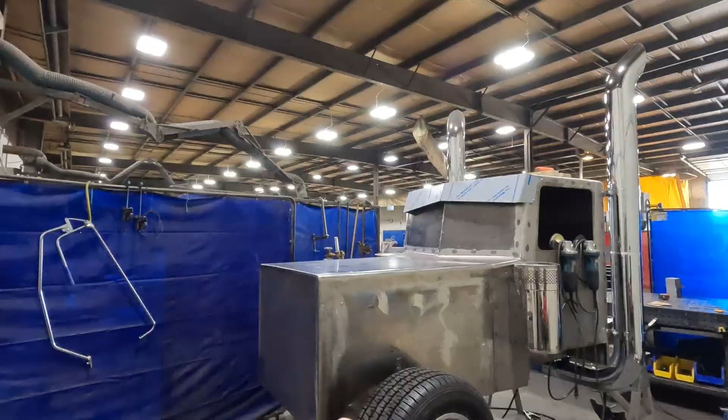So it's crunch time, I have to have this done by the end of the month. In this episode we're gonna go from this to this. Stay tuned, you're not gonna wanna miss this.

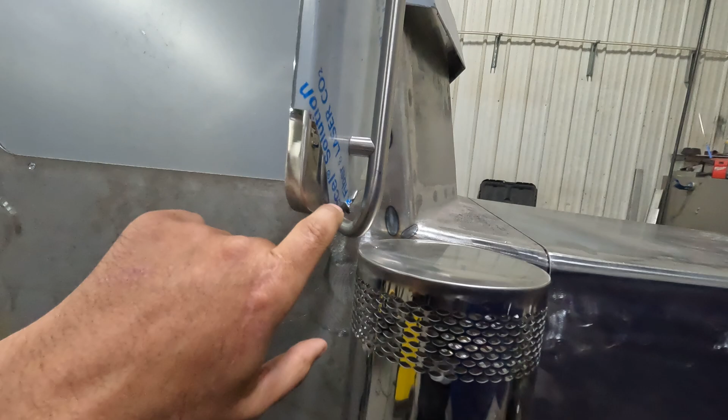I had a complete awful morning this morning. I was a couple minutes late for work, my kid forgot his swimming stuff so I had to go back to drop it off at his school, and a cop pulled me over to inform me my registration is out of date. But luckily Gabor, the Hungarian fab machine, has my back covered, so he's been extending the frame rails. It's awesome when you work with a guy and you can just trust that he's going to get the job done right. Gabor also finished up getting these mirrors mounted, so we got a real nice little cope going in, held on with screws, nice and stable, nice and secure, perfectly straight and level. He did an awesome job. Thanks for rescuing my morning, keep up the great work Gabor, appreciate all your help and what you do.

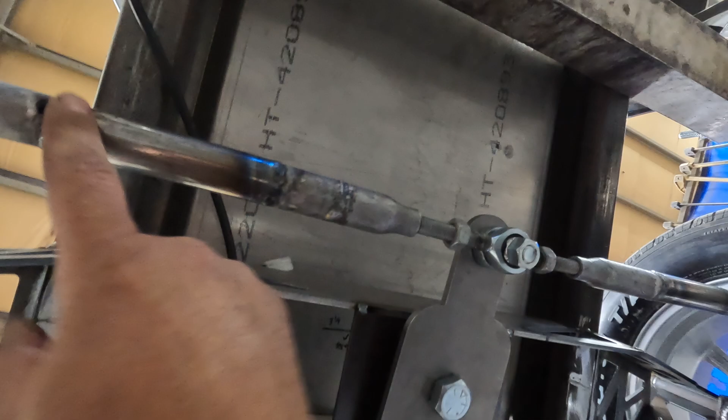So underneath the smoker right now, and I got the steering kind of dialed in, it's just clamped on. We had to extend my pivot point out further, went to a single pivot point off of the tie rod ends, which we lengthened 4 inches.

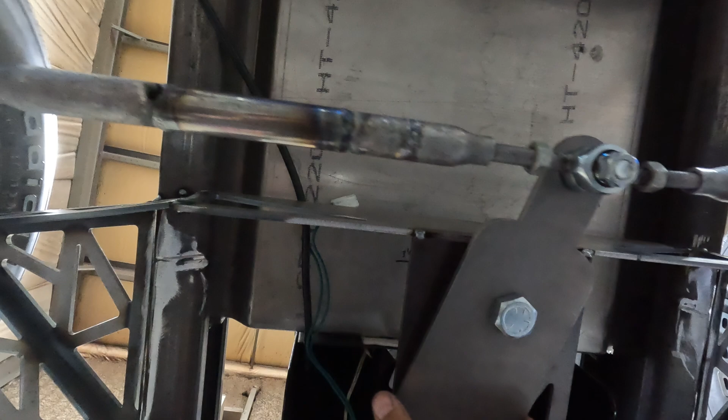Turning it, checking clearance. Not having any binding, not having any issues turning it, so I'm gonna call that good.

I'm gonna pop my pivot piece off because I actually want a 1-inch bend down there and down there, and then I can weld a receiver hitch tube to it. Then the tow bar will just work off of a standard receiver hitch. I'll clean up the stuff underneath here, pop this stuff off, get this bent, weld some stuff out, and do some adjustments.

So this has been adjusted. I set this camber to the exact same as the other side, and I also set this angle to the other side, but first I leveled the truck so I could get accurate measurements. These are to the 100th of a degree, and this is 0.03 degrees off over camber, so hopefully the tire and all the weight just allows a little bit of relaxation.

While I was doing that, Gabor was welding out the frames, keeping those nice and straight. Back to work. And there we have the bumper placed.

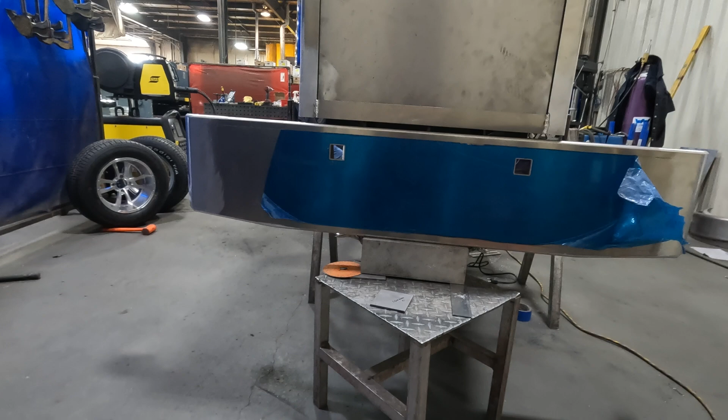So I set the height of the tires off of this spool, and the bottom of the tire was measured with a 3-inch piece of tubing. This is a piece of 4-inch, so in relation the bumper should be about 1 inch off the ground. Got a pretty tight clearance.

So my gaps are all right, clearance the whole way, nice and tight fit. It closes, looks proportional, looks pretty killer.

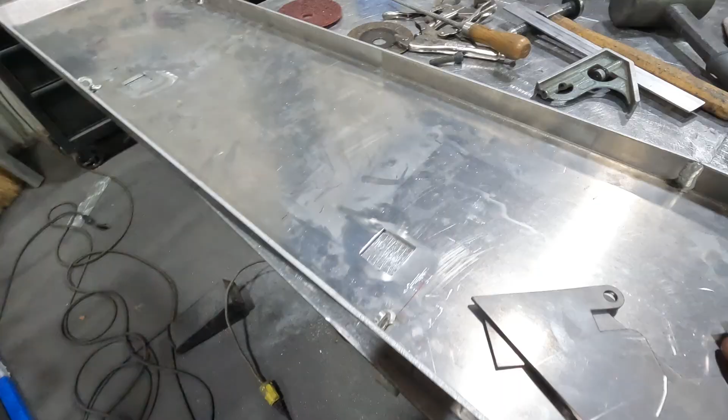So we now have bumper brackets cut out, adjusted ones. These are gonna kind of come up like that. This gets welded on the truck, it'll pivot. You have to allow everything to move and keep the pivot points up and far enough away that it doesn't interfere with the tire. Animal guard cut, ready to get bent.

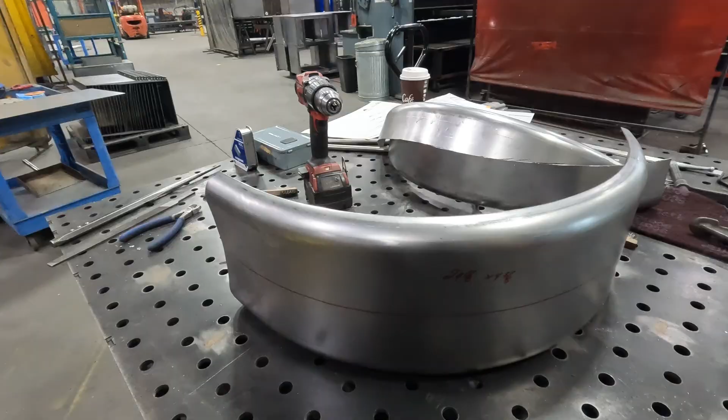Got one fender cut, got the other one marked out, and I will zip cut it now.

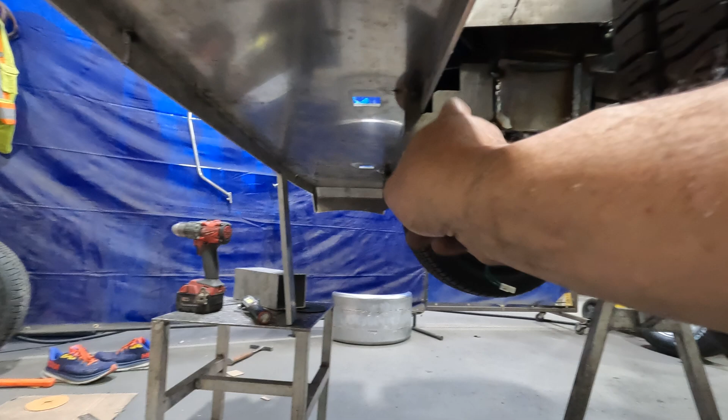Fenders widened, welded up, one left to weld up. Gabor's been doing awesome on the front bumper here, swings down nice, and when it pivots up, the flange here actually recesses into the bracket.

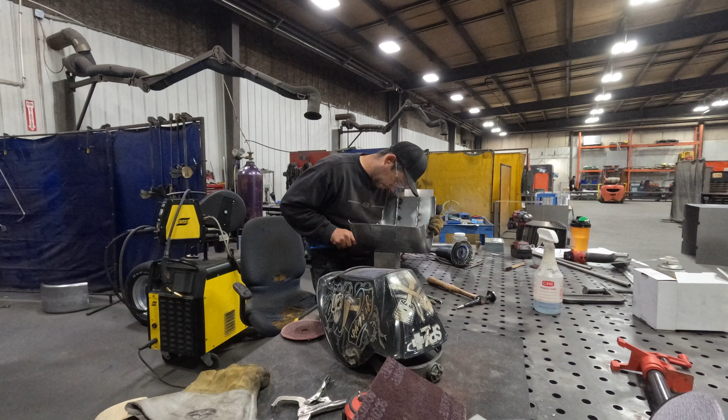So I've been trucking away on my fenders. I got this one just sitting up there, it's not actually mounted like that but it's extended. The radius is changed, and I sanded out the marks from stretching the flange to change the radius.

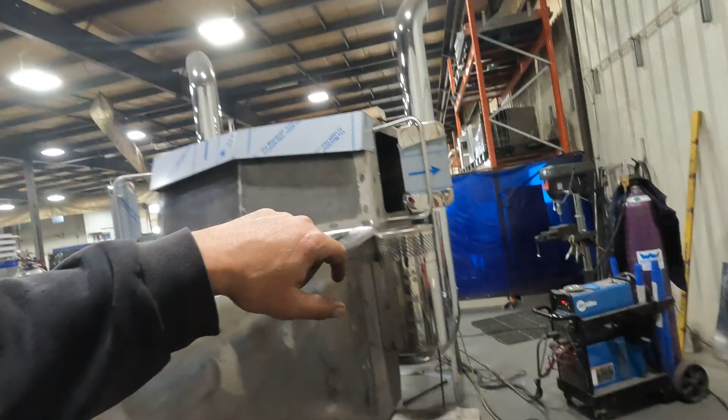Clients came down, they had a look, they said this mirror's just a little too big, they want it to be smaller. So I got to take 2.5 inches off the height and 1 inch off the side. Kind of sucks, took a little wind out of my sails, but is what it is. Client's not happy, it's not right.

Let's get the fenders on the truck. They added a few things that I have to do here, so long ways to go, short time to get there. Let's set up time lapses and enjoy the next few minutes as I bust out a bunch of stuff.

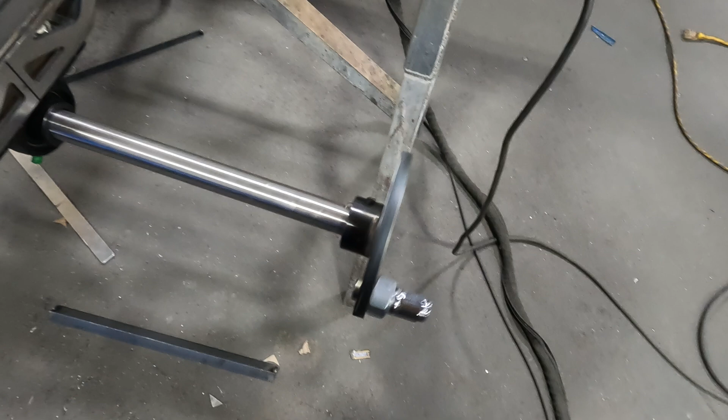Drew up these brackets, kind of look like a little stormtrooper, but now the axle is set in place. Got to straighten this stupid hub from Princess Auto, that's no bueno. This axle was quite stubborn as well too, it was a pain in the butt to get in there. We had to use a lot of spit, sanding and persuasion to get them in, but she's in.

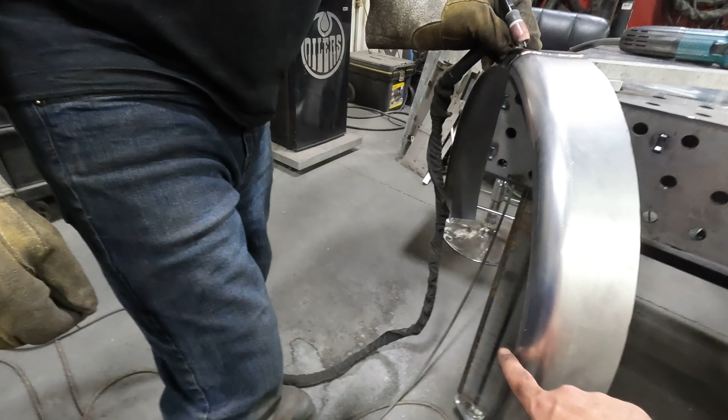Got our rear fender tubs cut in half, we're knocking off 4 3/4 off each one. Gabor's putting them together using some silicone bronze, and then we'll planish them out and flatten them down, and on the bottom half we'll take the radius out.

Are you having fun? I'm gonna get suited up, let's do some aluminum TIG welding and get those steps all finished.

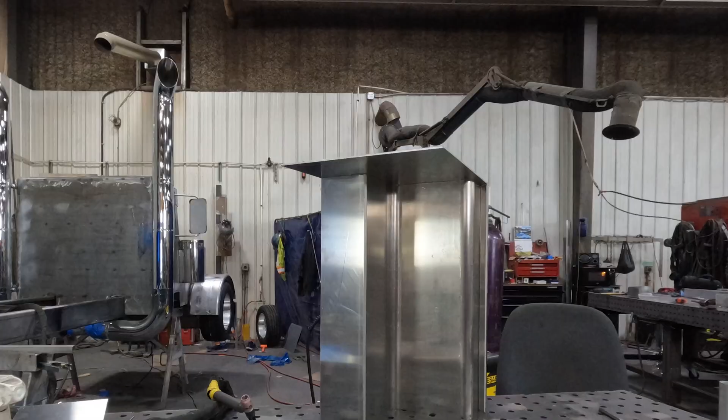I got the steps with the mock air tanks up there. So I'm just waiting for customer approval before I finish welding everything out and get the brackets built, to make sure it's okay.

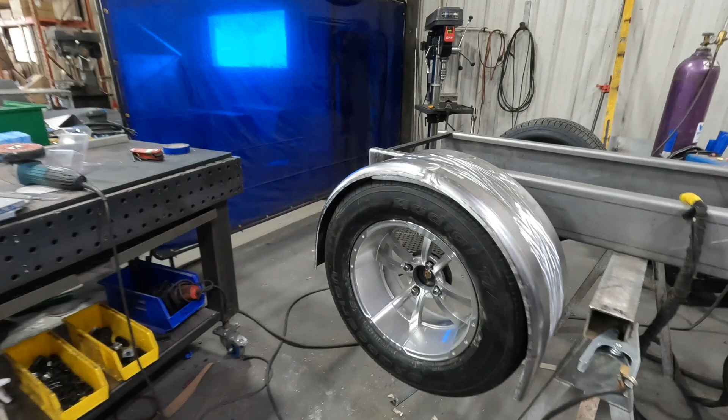Gabor built some pretty wicked fenders. I showed him how to use the shrinker stretcher, and we got the tires blocked up. I had to rebuild those hubs we got from Princess Auto, and they're going all kittywampus on us.

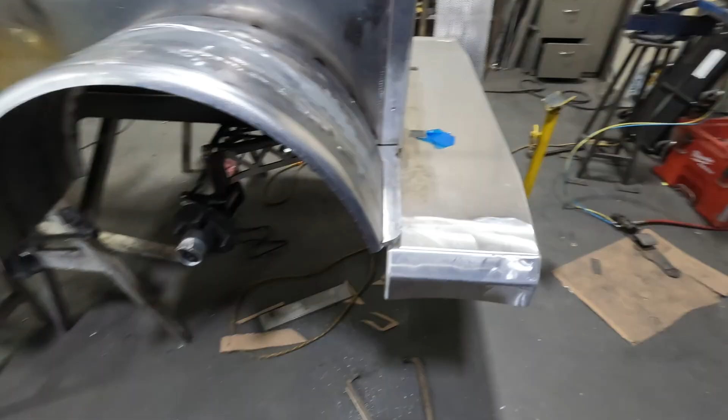So cut them apart, re-welded them, got them bolted up. I got this radius cleaned up better. Got a little bit of a weld repair to do there. I've been working on this bracket on the front.

It clears. So my gap is nice and the same down here. I have to clean this up and put a radius on it and make it look more like the factory one. Add a little fill piece here. Get it all cleaned up.

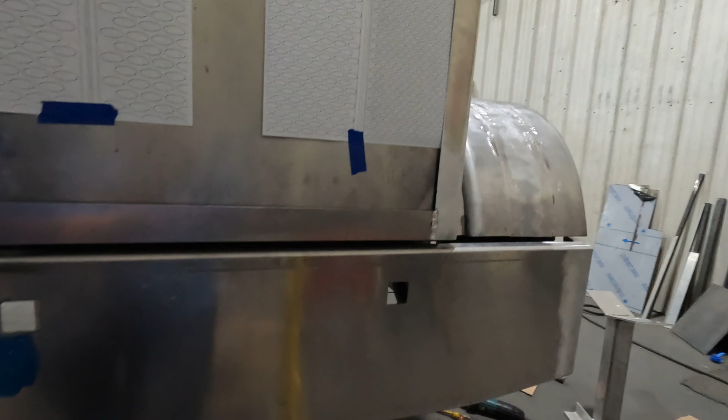So now I'm just working and doing it on this side. And then Gabor, he's coming up with something cool for the fender mounts back there.

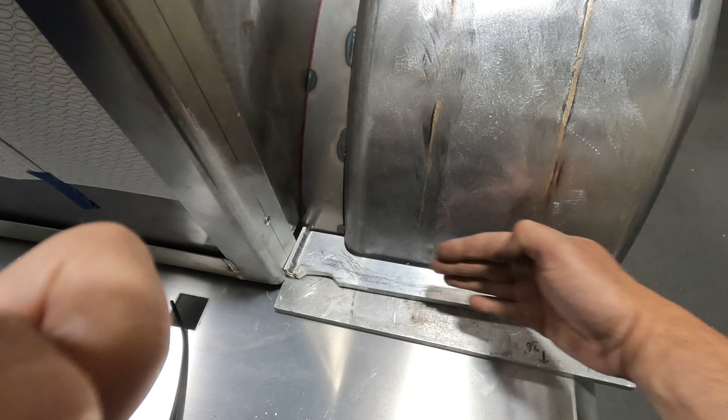So I have these front trim pieces. I've matched the contour here. Don't worry about this deflection, the fender will be flat. So once the bodywork goes on there, then that'll fit nice and good.

But now I need to shape this. I have both sides matching exactly. I clamped them together and ran them on a belt sander, so they match exactly. Now I just need to put a whole bunch of contour in, because if we look at the model I was going off of right there, that's kind of what I'm going off. So I'm going to do my best to match this to that picture.

Gabor's been killing it on the back fenders. We got it spaced off with some hose we had lying around. It's even. He's just coming up with these brackets. So these clients, they have their own line of stuff that they get manufactured for us, and this is their style of fender brackets that we make for them.

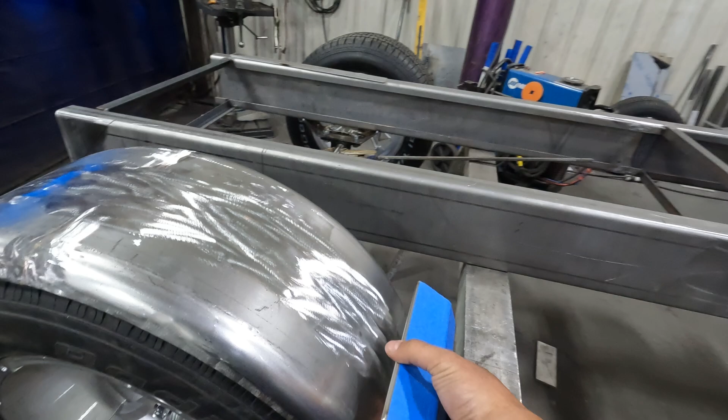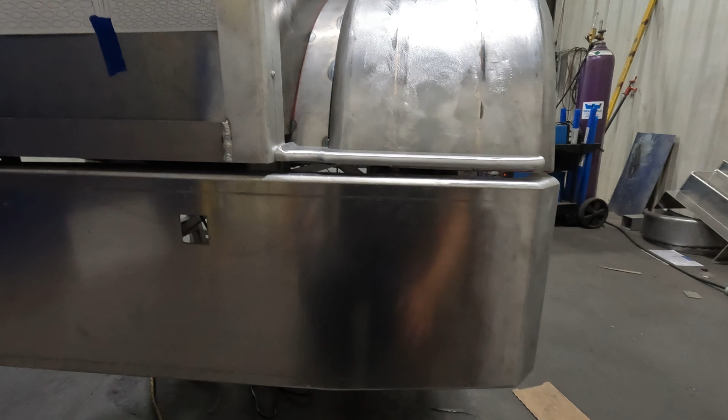So it's going to kind of go on like this, so it'll match all their other trucks, and they'll just get bolted to the frame. There, a little bracket, it's just pressure fit in here. I actually don't have any screws on it right now, but man, does that look good. So pop this off.

There's the difference, this one's all sanded and blended and cleaned up. And just like that, we're finished. Put these on, move on to those. All right, so...

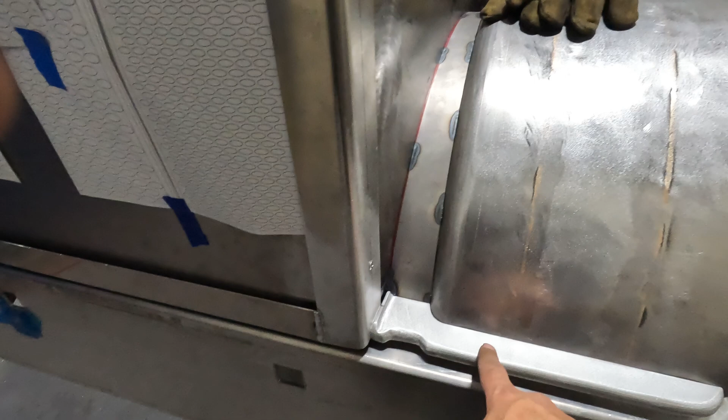It's actually the next day, and I've just been chipping away. These guys I ended up re-drilling and tapping and got them all bolted on. They look killer, really sets off a good look to the whole front end of this truck.

This step, welds are blended out, air tanks on, mounts are on the back. Just got to trim them down a little bit so they clean up a little nicer. And then we're doing it to the last one there now too.

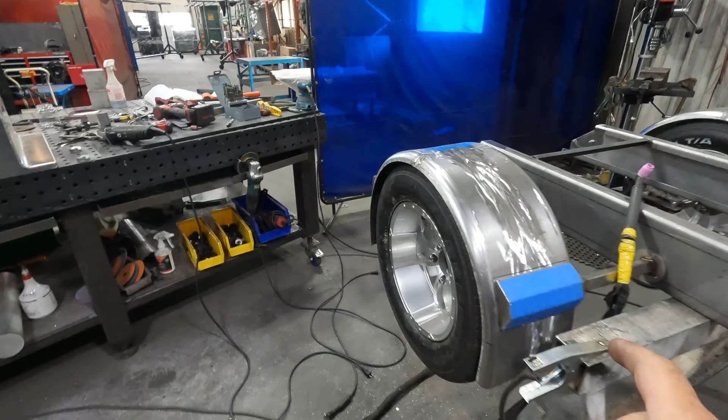Gabor finished up the fenders. Just a couple little things that I can touch up and they're going to be ready for paint. The back end of the frame is all notched.

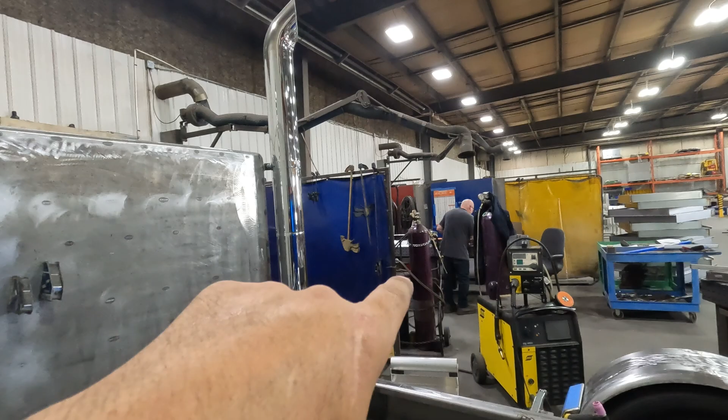But I lost Gabor, he's gone now. He's on to bigger and better things. He's still right there, he's just on a different project. He's back on his own stuff rather than helping me out. Let's have a moment of reflection for Gabor and all the wonderful things.

Yeah, he'll be back on this, I'll be getting his help, so you'll see him again. So let's set up a time lapse and I'll finish this last step.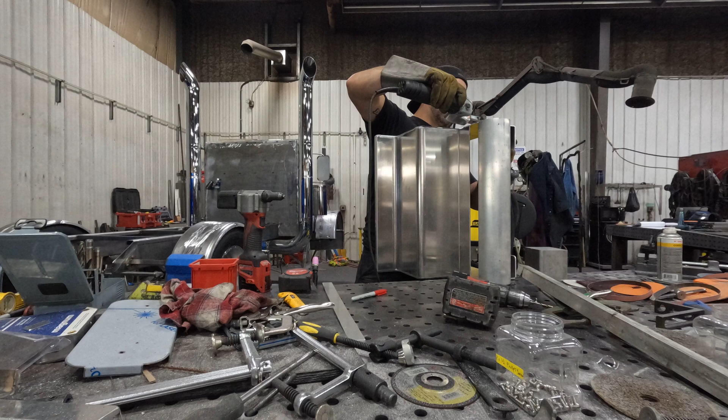Fuel tanks are on, looking pretty sharp. Here is my finished punch list. So I'm gonna start chipping through this as fast as I can. First things first, I want to start on this one.

Fill in the bottom of the cab under the air cans and clean up the fenders. So I'm just gonna extend this down, and get a kind of a slight curve to kind of match the 389s.

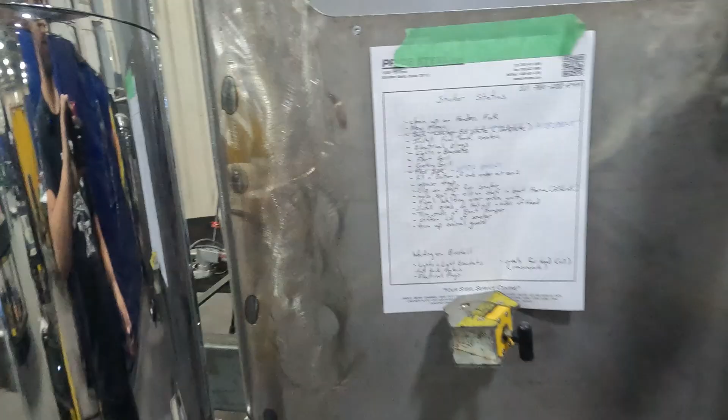Clean up fenders, fill in bottom underneath air cans. That's that piece right there.

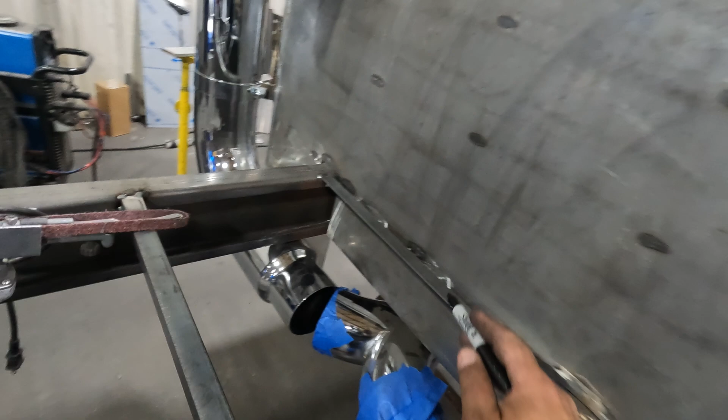So now let's move on to electrical plugs. Got to mount this one. This is where all the power is going to input. It's going to go into this plug, and then the smoker and the inline fan will be plugged into here, and then power is going to go out, and then there's going to be another female receptacle back here where they could plug whatever they want into back here.

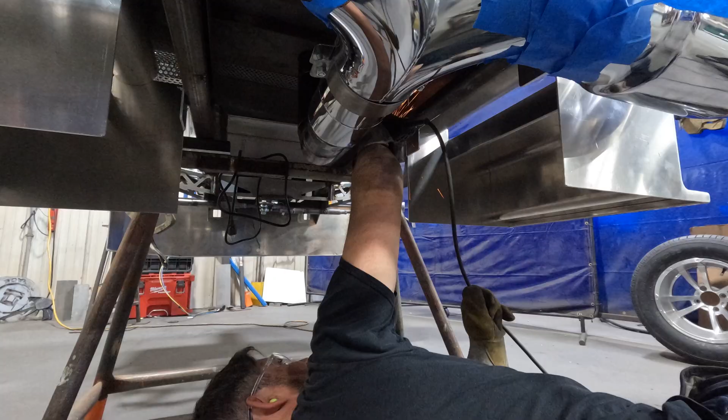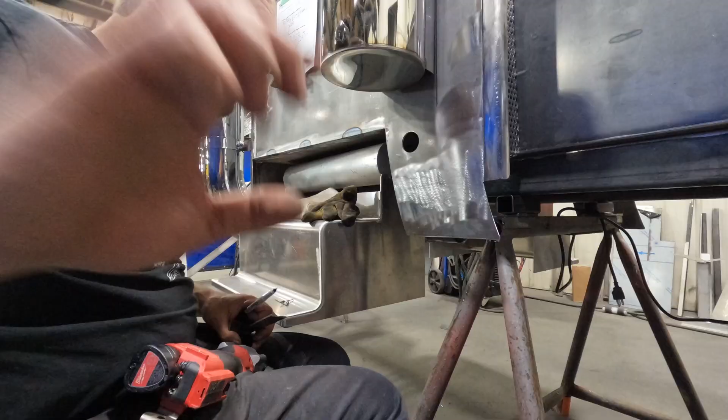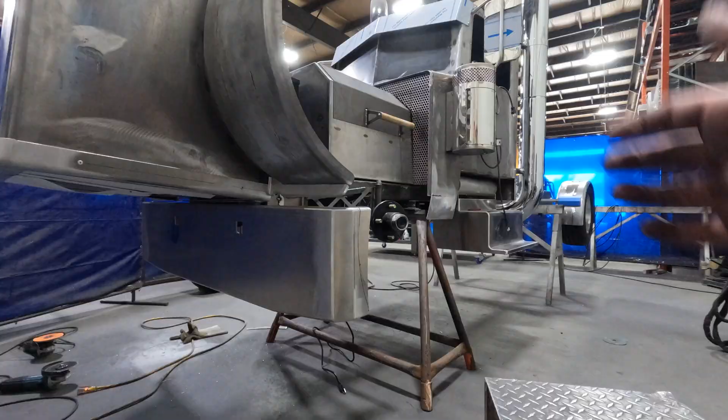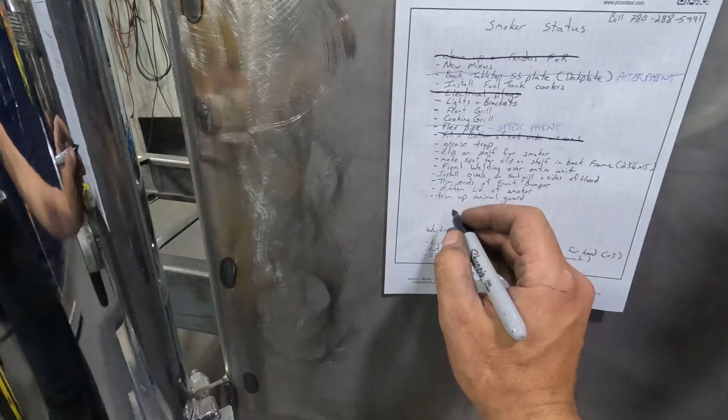Electrical plugs done. I think I'll move on to the trim ends of the front bumper now. All right, trim the ends of the front bumper. That one's done. That makes a huge difference when that radius is folded a little better.

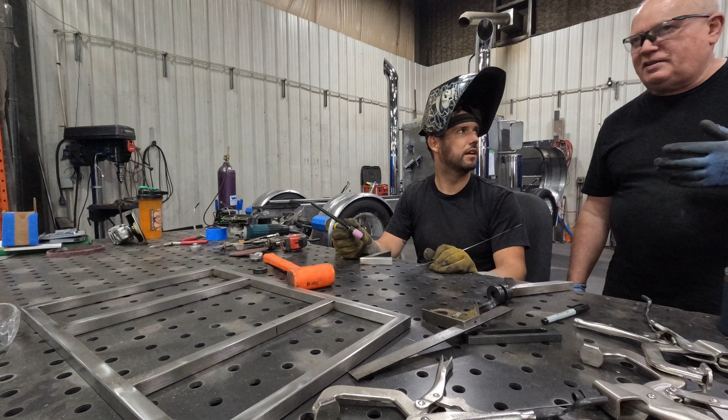I got the replacement mirrors on, so these ones are a bit smaller. They're 5 inches wide by 9.5 inches tall. The other ones were 12 by 6.

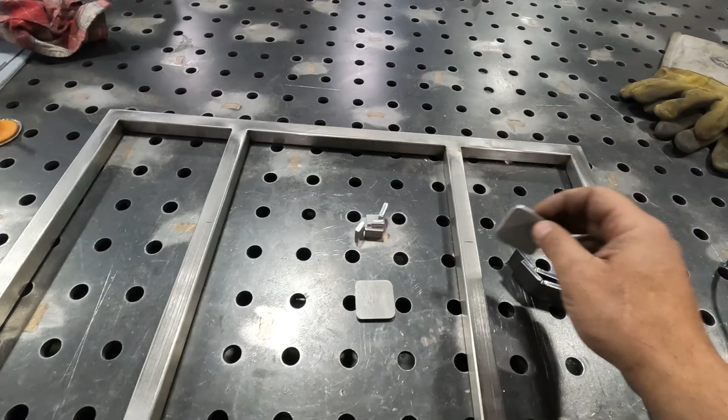I was doing that while I was waiting for parts. Got a whole bunch of parts off of the laser and they've been broke up. These are going to be my tabs to receive these guys, they'll go in like that. These are spacers, they'll get welded on these, and the whole thing will be flush on the end like that.

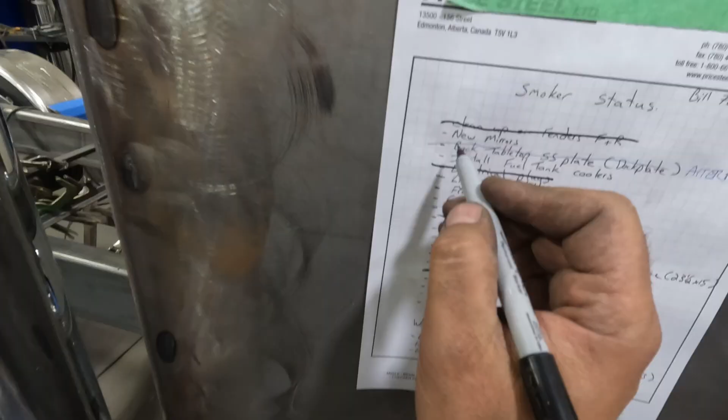New mirrors, they're done. Grease trap, that's done too, just made it out of light gauge stainless.

It tucks in from underneath here, pops right up and sits in, and then I'm going to drill and tap a little hole here so you can hand thread in a little cap screw.

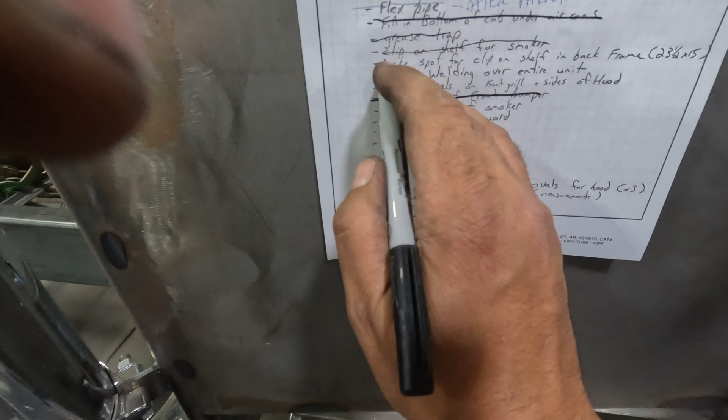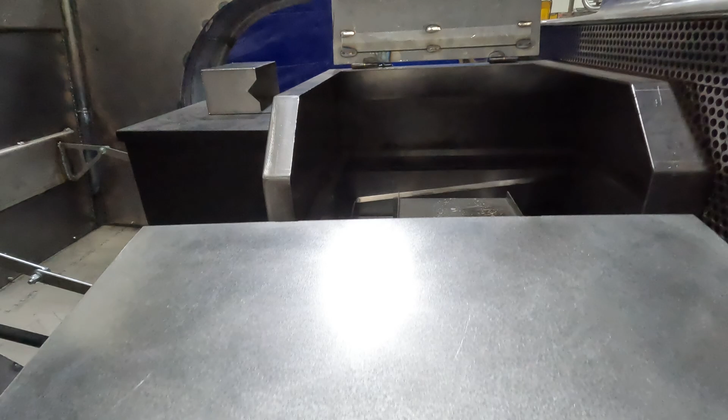Clip-on shelf for the smoker. Make a spot for the clip-on shelf, those two are done. The shelf slides in the back here, tucks out of the way. Let's see if I can do this one-handed. It clips on, pretty sturdy. Pops off, and everything closes.

Now I've just been working on the grill, so when I bring you back we'll be in the laser welder working on that grill. My next major thing is to finish the actual front grill, so I'm going to pop this aluminum piece off and clean it up a little bit.

Okay, so we're in the laser booth right now. I've got Gabor giving me a hand. We are going to weld in this grill.

This machine's awesome.

Any of you old guys watching this and you're just like, I don't think it'll work—it does.

Done with the front grill, so let's move on to the cooking grill. I just had to take a minute to just take this in. I'm exceptionally proud of how all this is turning out.

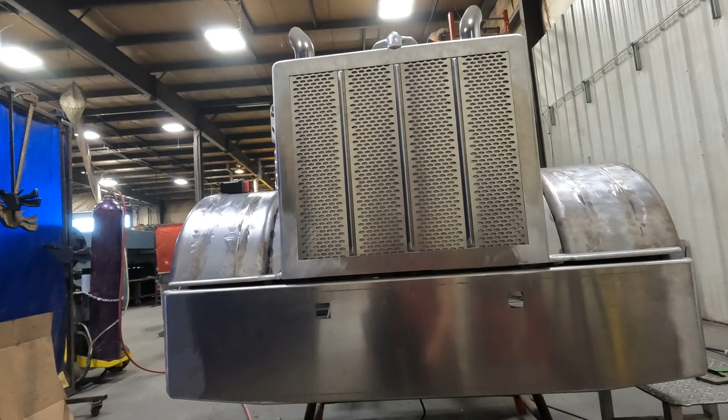I think that grill looks amazing. Once it's all polished and painted black behind it, it's just going to be such a focal point. So every bit of aluminum on this truck gets polished, every bit of mirror finish also gets polished as well.

I'm just waiting on the lights and the light brackets that the other guys wanted to build themselves, and then I can get them bolted up, because I won't want to do any drilling and bolting and fixing after everything's been polished and painted. I'd rather do it now.

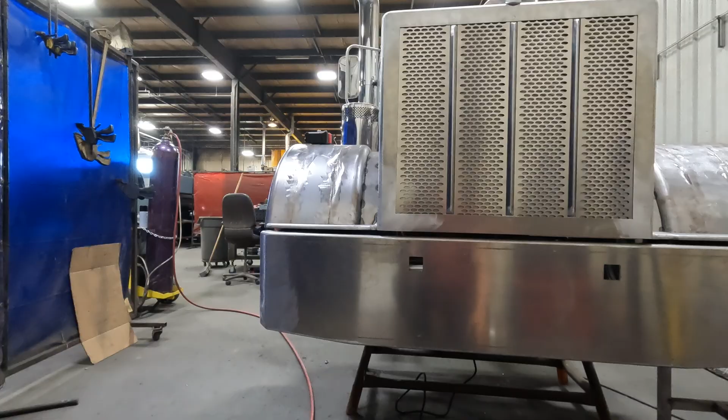Just have to take it in once in a while, be proud of what you've done.

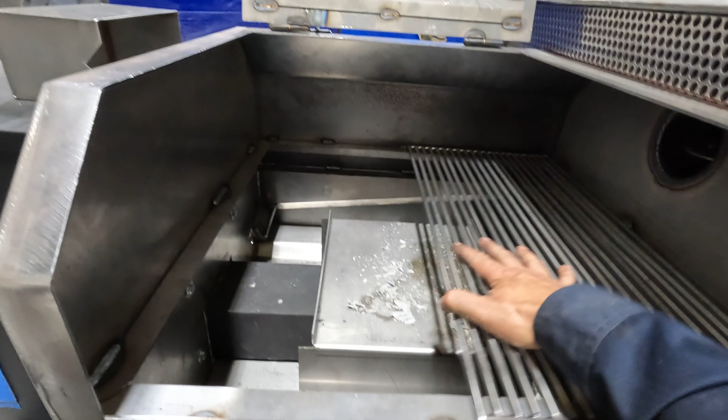All right, so I got half the grill done. It slides over, I'll meet roughly in the middle. I want a little bit of a gap so it's not bar versus bar. And then, yeah, let's go build the other one.

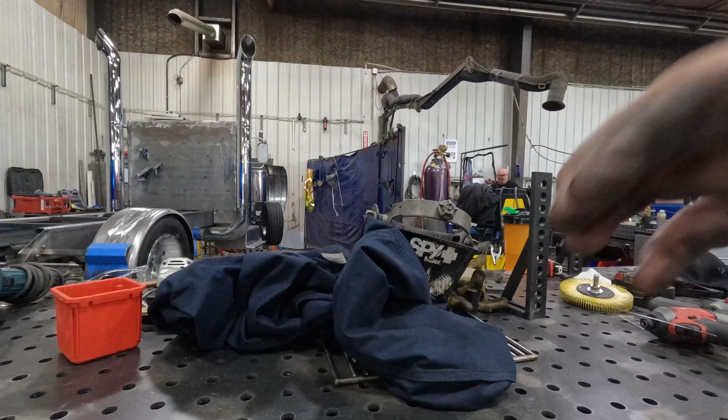I got the lights and brackets here, so I just got to mount them. Front grill is done, cooking grill is done, flex pipe after paint, final welding—those are getting drawn up.

Stiffener lid, that'll be after. Receiver hitch is welded, tow bar is done. Electrical plugs are here, I got my lights and brackets.

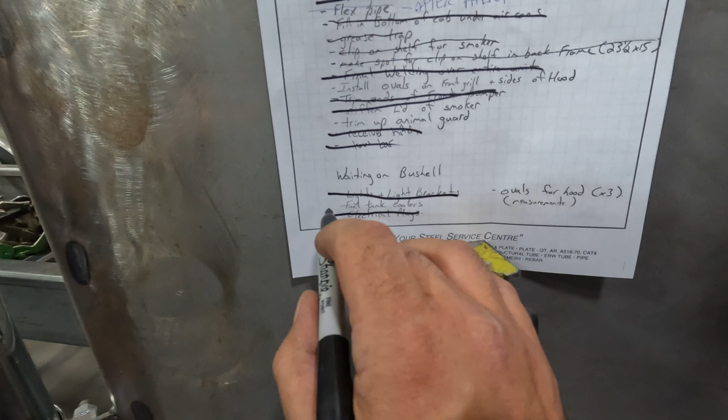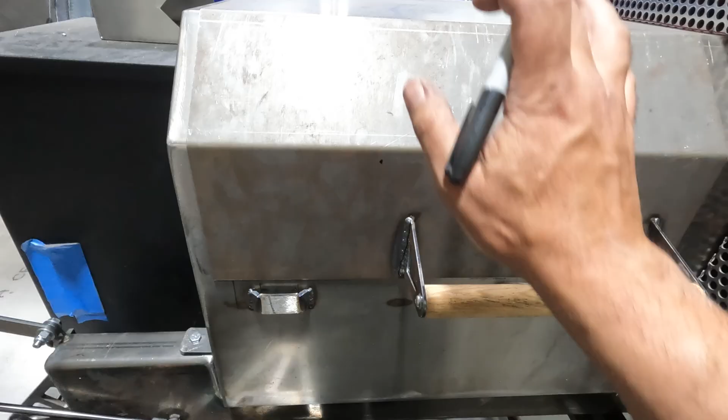So all I have to do is, I just want these brought out a little bit, and then I got to move this over here. And then I need a temperature dial there. They want a little shelf up here, a little warming shelf.

They also dropped off their headlight brackets, so I'm going to have to mount these guys on somewhere around here. Back on the truck again today, finishing everything up.

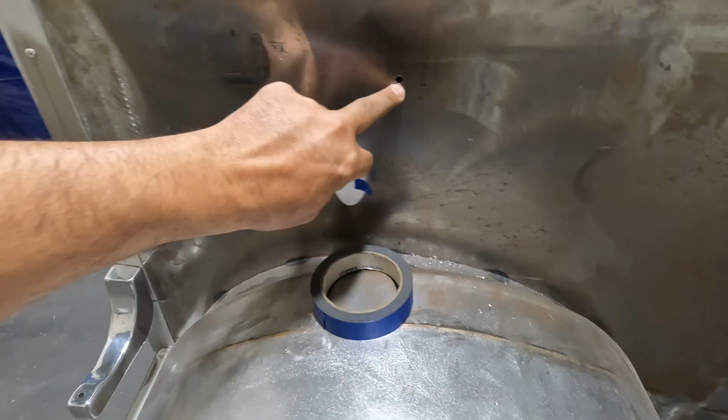Started off, I got some of these little ovals made, marked my hole, drilled it, marked my fender holes. Our laser was down, needs some new parts, so I just got paper templates and I'll be able to build those later once this is off to paint. So now I can finish checking everything off.

Lights and brackets done, it's all ovals. Well, those aren't quite done, but my holes are drilled. Trim up the animal guard—I'll do that as I'm taking everything apart.

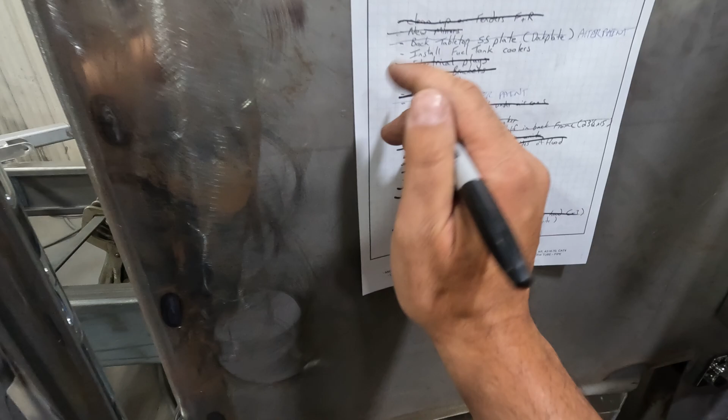But right now, the only thing I'm really left waiting on is my fuel tank coolers. I don't have the tanks, I don't have my brackets, but I'll be able to build them all and then get them painted and install everything after paint. It's just a little more inconvenient doing it that way, but it's still doable.

So for now, I'm just going to start disassembling this truck and getting it ready for paint. All the aluminum's going to come off, all of the stainless is going to come off, all of the chrome work's going to come off, and then lower the truck down to the ground and steer it out of here and send it off for paint.

Okay, so I'm about to break this down, get all the aluminum off to polish, get all the stainless that's been welded off to polish, all the chrome work off, get it broke down ready for paint, and get it sitting on the ground so we can get it towed out of here into the paint shop. But before we do, let's have one more look at it.

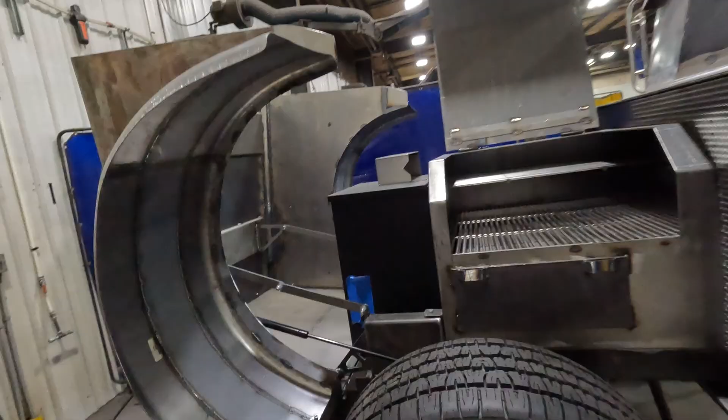All right, we're back, it's broken apart, it's on the ground. It rolls much easier than I thought it would, so that's awesome. But she's looking low—can't wait to see what it's going to look like once it comes back from paint.

So stay tuned. Next episode, we're reassembling this and firing it.